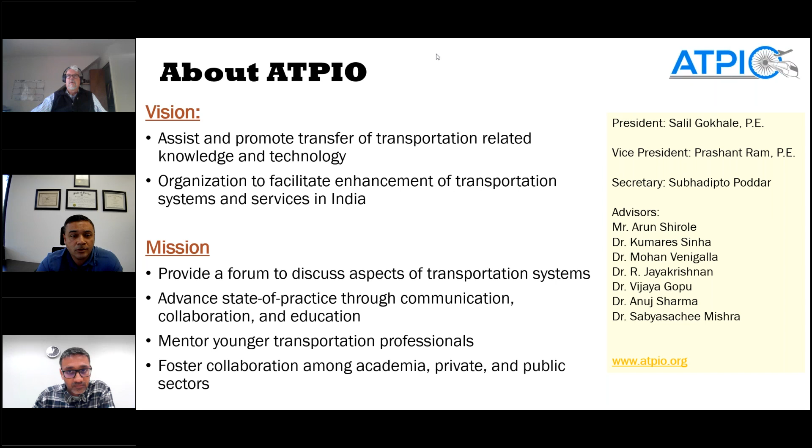All right, thank you, Salil. So today's webinar, Salil mentioned the topic, it's all about reducing the carbon footprint of concrete, and this is a very timely topic today. You might have seen the announcements from the White House. In general today, there's a lot of emphasis on moving towards greener energy sources, greener materials. I won't say anything more, that's what we're here to learn about from Tom. But I'm not going to give you a formal introduction to Tom, as many of you might already know him from other interactions with him. So I'm going to tell you three things about Tom today.

The first time I actually saw Tom Van Dam's face was on Michigan Tech University's webpage about 17 years ago when I was applying for grad school. I was looking for professors to work under, and I saw that photo on the webpage, and I thought, this is a person I never ever want to work with. That photo was really scary. So the lesson learned was, first impressions are strong, but they are not always right. I've had the opportunity to work with Tom a lot over the last 15 years, pretty much my entire professional career. And then I've gotten to know him a lot more closely through projects I've worked with him on, and he was the one who introduced me to the topics of environmental sustainability and climate change.

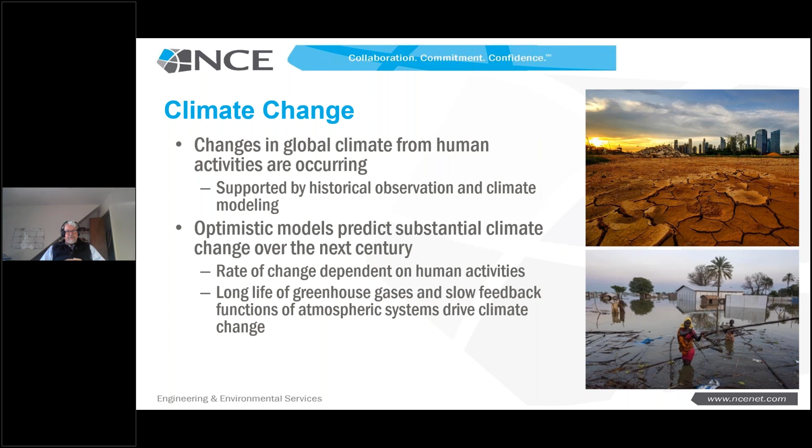Optimistic models looking forward predict substantial climate change over the next century. And the rate of change is going to be dependent on what we do as a species worldwide, and these greenhouse gases that we are emitting today have a very slow feedback function in the atmosphere, and they are driving climate change. And even if we change our ways today, we're going to see these effects at least till 2050.

The certainty is spelled out in the IPCC 2021 document, summary for policymakers. It's unequivocal that human influences have warmed the atmosphere, the ocean, land. Widespread and rapid change in the atmosphere, ocean, cryosphere, and biosphere have occurred. This is without question. The uncertainty really lies in how the future will change, depending on uncertainty within the models and in the uncertainty of what we do.

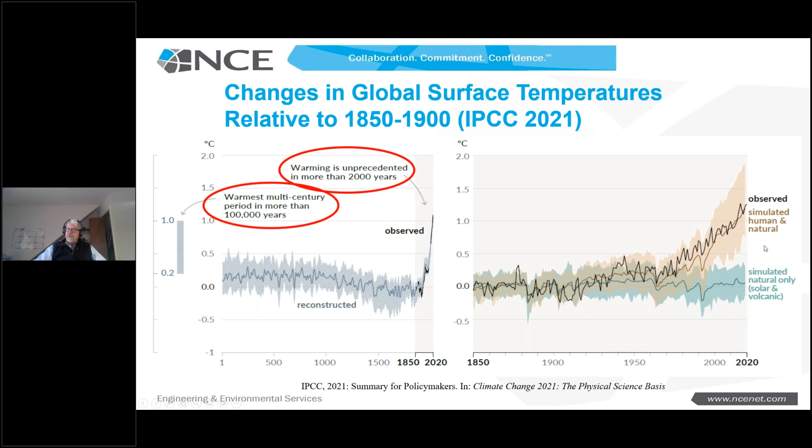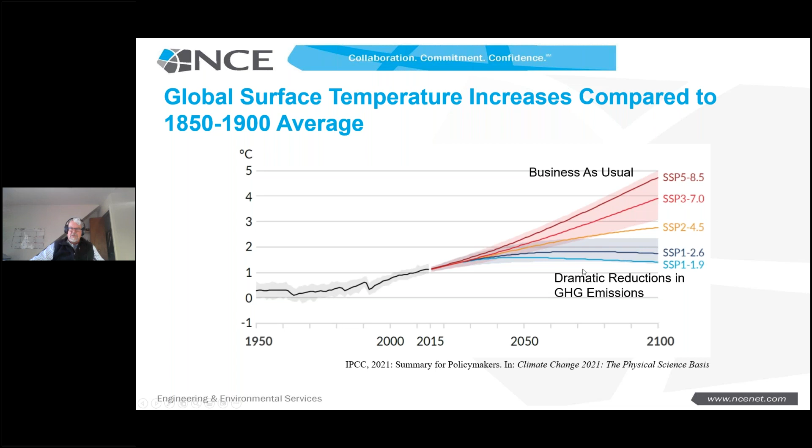If we look at those averages, they take us to about this point right here. And depending on what we do going forward, if we keep business as usual, we are going to see dramatic, almost 5-degree average change in centigrade into the future by 2100, which would be absolutely devastating to the world's ecosystems and to humanity. If we even do modest or fairly aggressive changes to try to reverse things, we'll get here to just under a 3-degree centigrade increase. And what we're really trying to focus on is about a 2-degree change, and that's going to require some really, really significant efforts.

If we look at that 2-degree increase in global average temperature, models would predict basically the entire globe is warming. Certain areas are going to be very dramatically affected, and that's the North Pole in particular, the northern part of the globe. The Arctic is definitely suffering right now. Permafrost is melting and there are a lot of negative impacts.

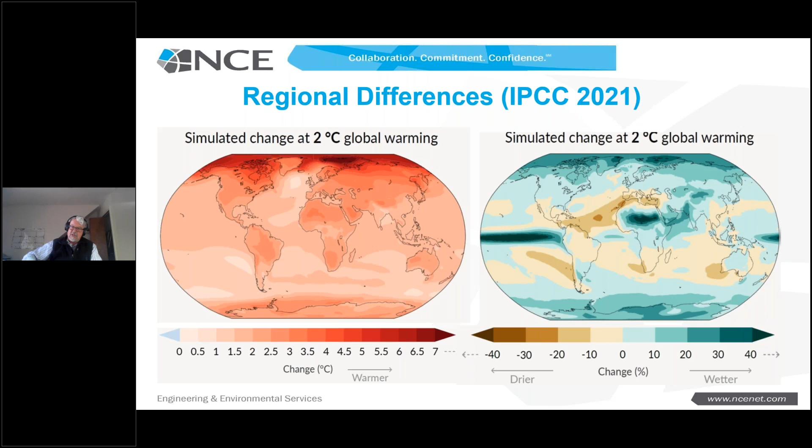Moisture-wise, it's a hit or miss. A lot of areas are going to get drier, some significantly so, such as in southern Africa, the southwest of the U.S., with predicted droughts. India, parts of it are going to get wetter, so India will be getting warmer and wetter, and with that higher humidity and higher temperatures, it's going to be very stressful on the population. Also, some of this water comes in other forms, as we'll talk about momentarily.

The likelihood of sea level rise, it's already rising. Most estimates are placing it under a meter, which will still be a very traumatic effect on a lot of the world, a lot of the coastal areas. But in the low likelihood, high impact storyline, if we get ice sheet instability, we could see 1.5 or more meters of sea level rise, which again would be devastating to coastal areas in which most of the world's population resides.

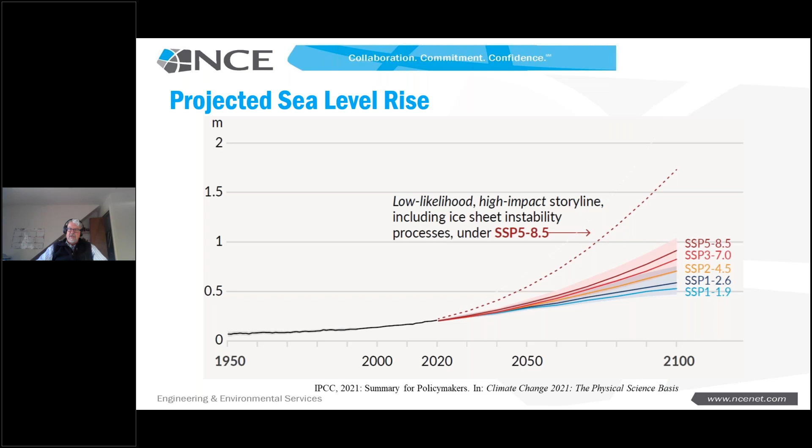It all depends on regional differences, temperature, salinity. I think the key element of what's happened recently is we're seeing much more flooding in coastal areas, even sunny day flooding, where there's no storm, nothing at all. Miami is starting to see flooding, and so are other coastal areas in the US and elsewhere in the world. But then also what we just saw recently with Hurricane Ian in Florida, storm surges can be really the most devastating effect on people and property.

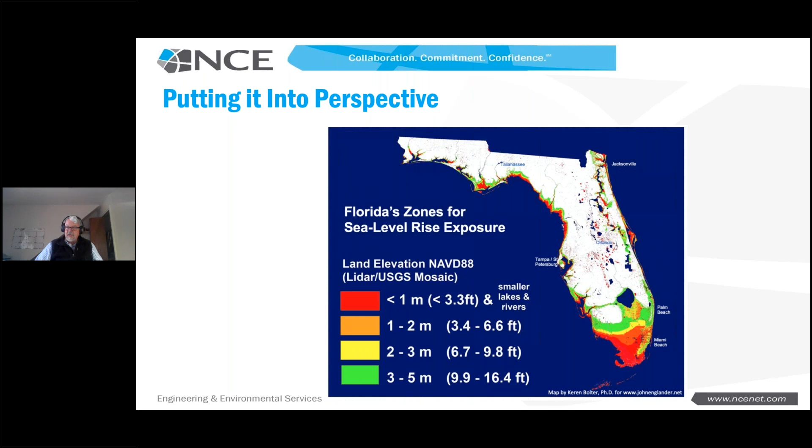And then the final big impact is droughts, wildfires, extreme storms. I lived for years in the Southwest, Reno Nevada, Las Vegas Nevada. The wildfire situation in California and the West in general is extreme. And then these extreme storms, where the extra energy that's been put into the ocean and atmosphere from the heat, it's not that we're going to have more hurricanes or typhoons, but the ones we have are going to be larger, with higher wind velocities and much more damaging.

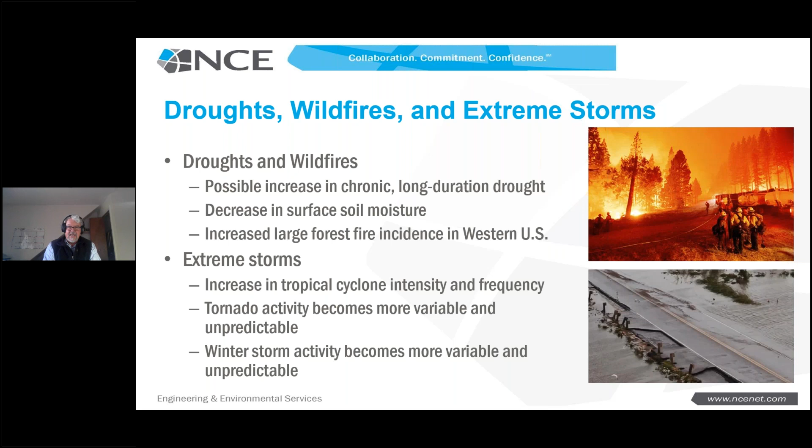All of these combined factors present a challenge. Really the challenge in front of us is that change is difficult. We all know this. It's very difficult to make people do something different than what they've done before.

Focusing on cement and concrete, these are traditionally carbon intensive industries, and we'll talk about that. The way we design, the way we specify materials, are dictated by the past, by what we know and what others have done before us, and it leads to a conservatism in our codes and specs. We have life safety issues we must adhere to, and it just makes it much easier not to change our behavior.

But I feel this is an opportunity, and it's exciting, we're allowed to get out of our rut, to embrace some of these new technologies, a new way of thinking about things, and really change our behavior, the behavior of our industry, and therefore the impact on the world, which is a nice place to be, to actually have an opportunity to make a difference.

The hope is we have a lot of new policies and initiatives focused on sustainability, and in particular carbon reduction. A lot of these fall under a broad umbrella of the Buy Clean initiatives. The cement and concrete industry is focused on change, true of the North American Cement and Concrete Institute, the European cement and concrete industries, and throughout India and Asia.

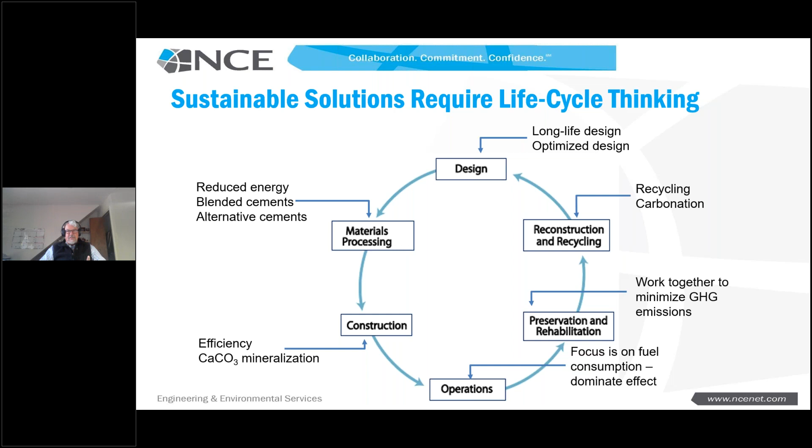Now, circling back to really the topic for today, which is hydraulic cement and concrete mixtures—I call it hydraulic cement, which primarily we're thinking Portland cement. This is the most common building material on the planet. Humankind uses about a cubic meter of concrete per person per year. It's an immense amount of material used, and it is not an exaggeration in the least to say civilization is built with concrete. Foundations for houses, water treatment plants are made with it, port facilities, pavements. You can hardly think of a civil engineering structure that does not contain concrete as an essential element.

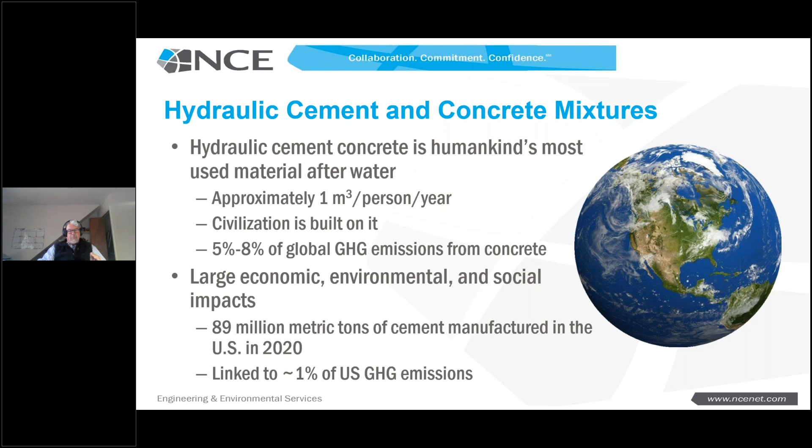But as a result of this massive use of this material, 5 to 8% of the global greenhouse gases produced every year are from the manufacture of Portland cement and concrete. The large economic, environmental, and social impacts of this material—in the US, we make about 89 million metric tons of cement annually. We're almost now at our steady state maximum, where we're now importing about another 10% into the US economy. It's linked to approximately 1% of the greenhouse gas emissions in the US.

If we look worldwide, what you'll see is the big user of concrete is China. Roughly 57% of global cement production occurs in China. The second largest is India at 7% of global production of cement, whereas the US is down around 2%.

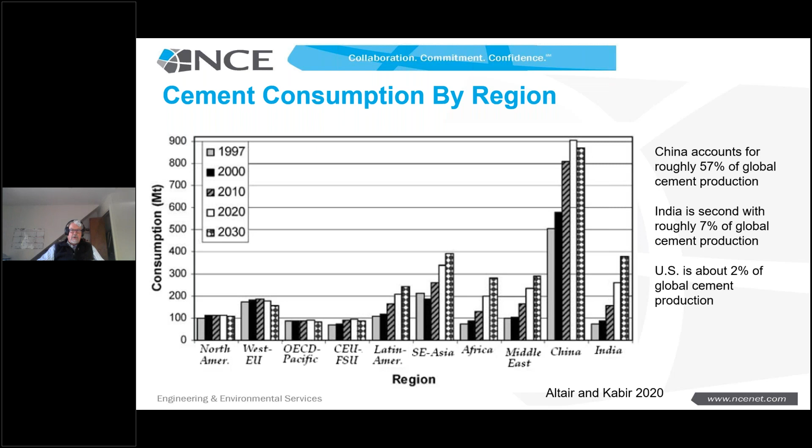The big fear here, and this has been written up in a number of papers, is as India continues economic development and growth, that they will follow the Chinese model. All of a sudden the Indian production of Portland cement will balloon, and it'll become a much bigger contributor to global greenhouse gases. We'll get to some things going on in India momentarily that are actually a bright spot to avoid this problem. Why is cement such a big deal?

We can go out, we can dig a hole, we can mine limestone, we can mine clay, shale, process it, get it ready to feed it into a kiln, and that's only about 1.5% of the total greenhouse gases associated with the production of that cement or concrete. 89%, almost 90%, is from actually burning those raw materials in a cement kiln. 37% of that is from the fuel being used, but 46% of all of the CO2 associated with a cubic yard of concrete at the gate of a concrete plant is from taking that limestone, converting it from calcium carbonate to calcium oxide and CO2.

A tremendous amount of CO2 is being liberated from burning limestone. Once we make the cement, that's over 90% just in the Portland cement. Only 9.5% of all of the rest of the CO2 associated with that cubic yard of concrete is from making this concrete itself at the gate. Net result is for about every pound, kilogram of cement made in the US, about 0.94 pounds of greenhouse gases are liberated, almost all CO2.

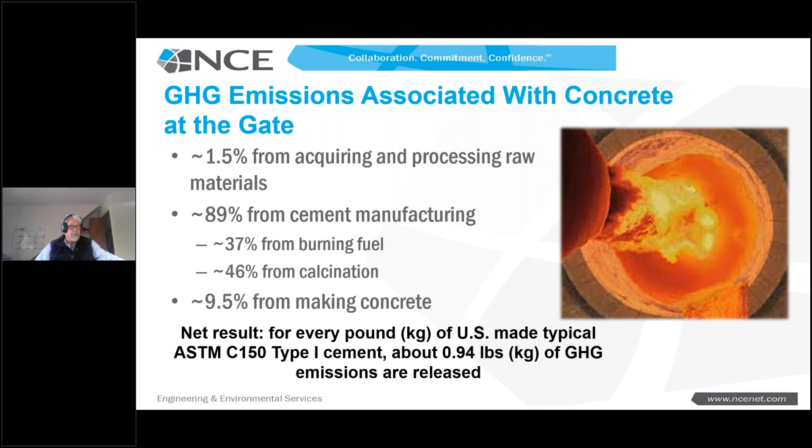So we take that cement, we mix it with gravel, sand, water, and some admixtures, and at a typical concrete gate in the US, we have about 310 kilograms of CO2 per cubic meter. 275 of that is from Portland cement production. So when you look at those numbers, you know where the focus needs to be, and that focus needs to be on Portland cement and what we can do.

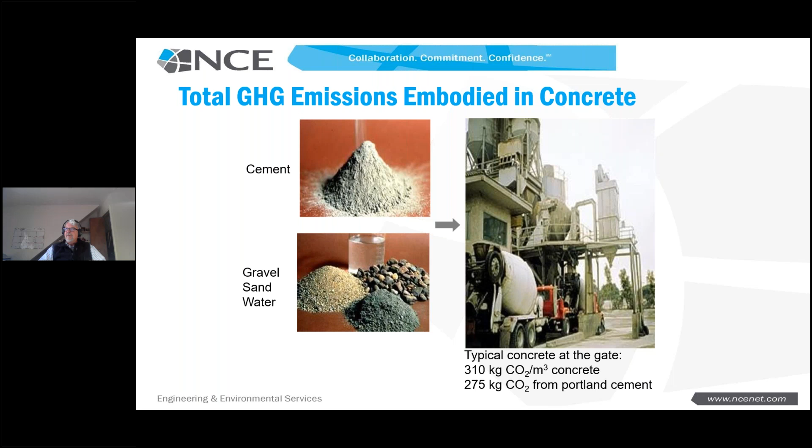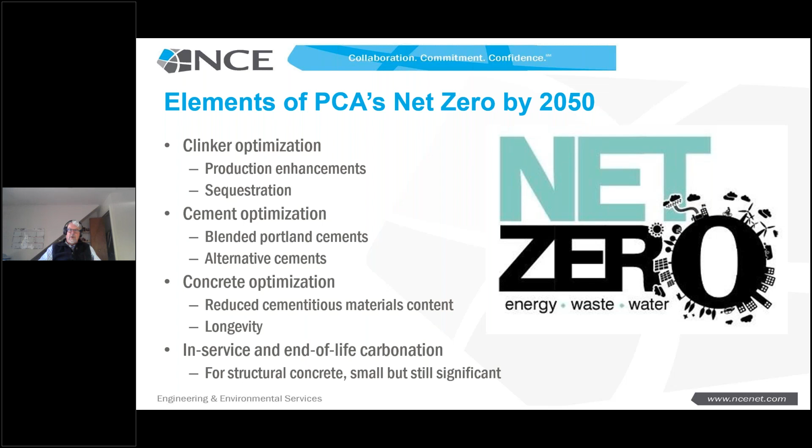So the Portland Cement Association, being very bright people, understands that this is something they have to grapple with. They have come out with their net zero by 2050 initiative. There's many parts to it. I'm going to quickly talk about a few, but they fall into clinker optimization, cement optimization, concrete optimization, and in-service and end-of-life carbonation. Those are four of the big pillars of what they're doing, and I'll talk about each individually a little bit. But the plan is definitely something worth looking at, and it's something mirrored in Europe and elsewhere.

So how can we reduce greenhouse gases during production? Obviously, we can go into super efficient kilns. We can look at high efficiency grinding mills for grinding clinker, gypsum, and SCMs and other blended materials, limestone.

We can look at waste fuels, and ultimately maybe plasma, if we can get lightning in a bottle and have something like fusion or an abundant source of clean, free electrical energy. But remember, this is only

35, 36% of the total greenhouse gases associated with making concrete. The other thing to recognize is because we're basically calcining that limestone and driving that CO2 out of the flue, you have about 25% mole volume of CO2 in the exhaust gas of a cement kiln. That is a great place to grab CO2. It's a great place to sequester CO2.

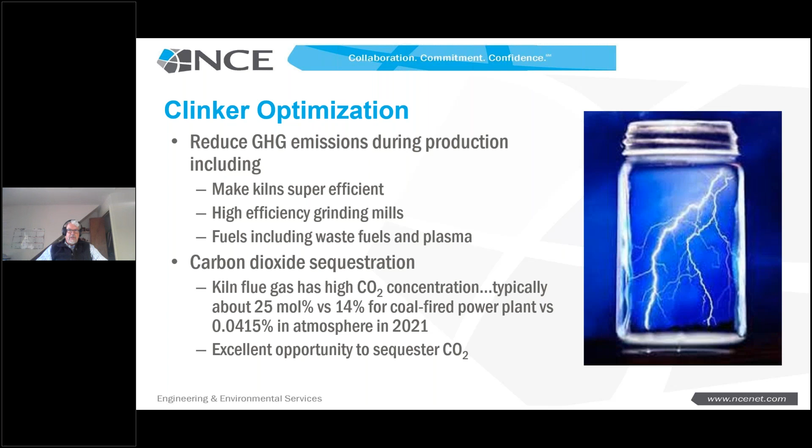The plan in California right now, I can tell you, is by 2035 they're expecting to have operational sequestration going on 1 to 2 of their 7 operational cement plants. Worldwide, this is already being done on an experimental basis and will largely be brought about throughout the world. Again, understanding where we're getting the electricity to do the sequestration, and what we're doing with the sequestered CO2, are issues we still need to solve.

When we move to cement optimization, this is about replacing that Portland cement clinker that we got out of the kiln with other things. The most common other thing is a supplementary cementitious material. In the US, that's most commonly fly ash, but it could be fly ash and other things. This can happen at the concrete plant, or it can happen at the cement supplier who does the blending.

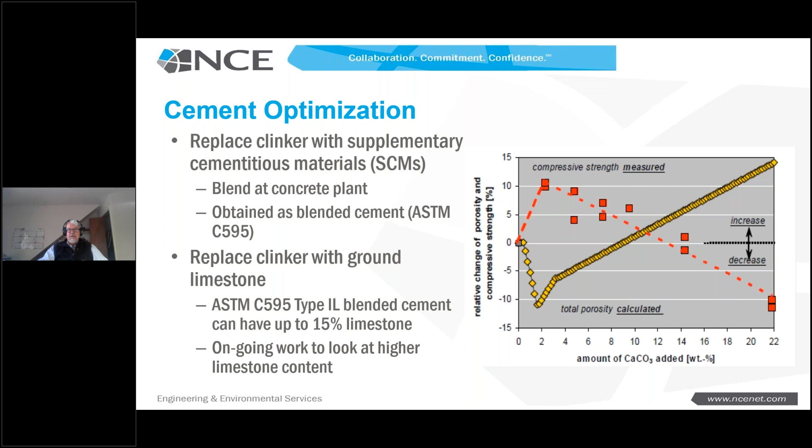A second thing that we can replace with is limestone. In the US now, with ASTM C595 type IL cement, which many of you are probably seeing in your markets if you're in the US, basically you can intergrind realistically 12%, some are pushing it up to now 13, 13.5% interground limestone. It works very well together with an SCM, and we'll talk about that. So we can start to reduce the clinker content of that cement, and that's the way to really drop that clinker factor, or the kilograms of CO2 per kilogram of cement.

Supplementary cementitious materials include fly ash collected from the flue gases of coal burning power plants. Less and less of these plants are available in the US and elsewhere, obviously because of the switch away from burning coal. We have slag cement as another source, where we can take ground granulated blast furnace slag and grind it up, and it creates an excellent cementitious material. And then natural pozzolans, calcined clays, volcanic ashes, ground pumice, other sources of natural material that are naturally pozzolanic that with some processing can be used.

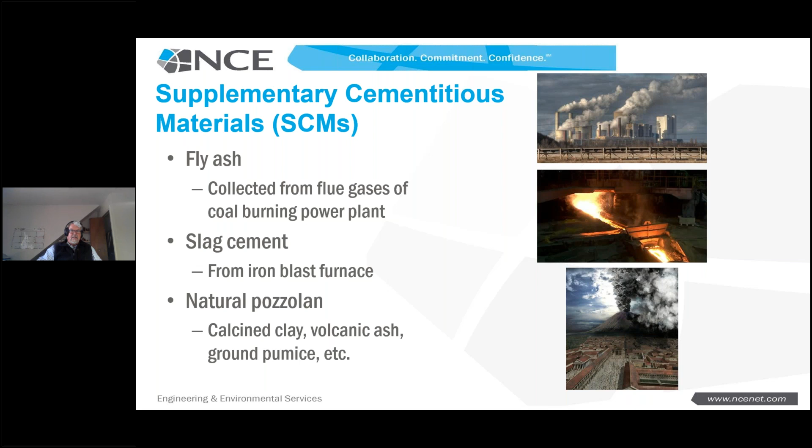So these are the common ones that have been used. These days, there's a lot of interest in alternative SCMs. ASTM C618 is starting to expand its definition of what is going to be an acceptable pozzolan for use in concrete. Reclaimed ash that's mined from landfills or ponds is one really major source of potential pozzolan, and this is

already being done. We often have to process this. We have to dry it. We have to burn out some carbon on occasion. We have to do some grinding to make it work, but it seems to work well. More uses are being considered for ground bottom ash, ground glass, and then there are some specially prepared pozzolans being looked at that are even sequestering CO2 in the process. So all of these are being investigated and more are being sought.

The blended cements that I referred to have been around for a very long time. The type IL was added, I believe, in 2008. This is very common in a lot of the world, very common in Europe to buy a blended cement. I've spent quite a bit of time in Africa, Central America, South America, where it was very common to buy your cement already pre-blended. But it's in general not a very common thing to do in the US, though I think we're going to see more and more of it.

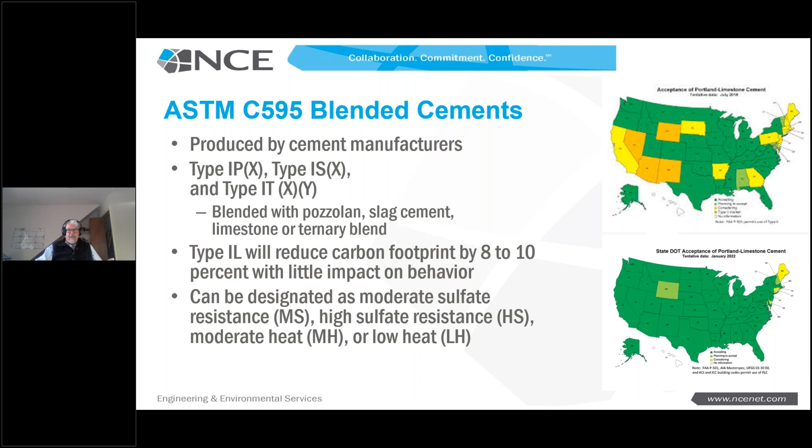And so if you can work with a ternary blend of a limestone with a pozzolan or a slag, these can be very effective because the sulfate balance can be handled by the cement supplier, and we can have a very workable product. There's also a lot of interest, because clinker is so energy intensive and so carbon intensive, to look at alternative cementitious materials.

These can include some that we already commonly use: calcium sulfoaluminates, calcium aluminates, magnesium phosphates are all cements that have been on the market throughout the world for a long time. Many of them are very fast setting, but they are often very costly. So from a price point, I know these are not something that can easily enter widespread use.

Non-traditional blended hydraulic cements - one that the world is very excited by is LC3. If you want to see a really interesting video on this, just Google Wisconsin Girl Scouts LC3. These Girl Scouts, led by a woman named Julia Porter, did a fantastic job explaining LC3. This is a blend of Portland cement, calcined clay that's of a lower quality than pure kaolinite, and limestone. On the right are some figures representing the LC3 type formulations that can occur.

This is something I was talking to Prashant about. He said there's already a couple of cement plants in India in full production with LC3. It's a possibility of using common, abundant materials to reduce clinker content by 50% or more of our cement, which is a significant step in the right direction.

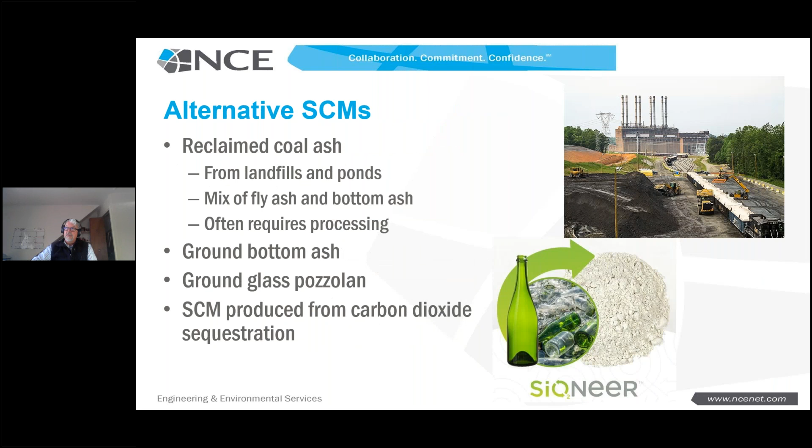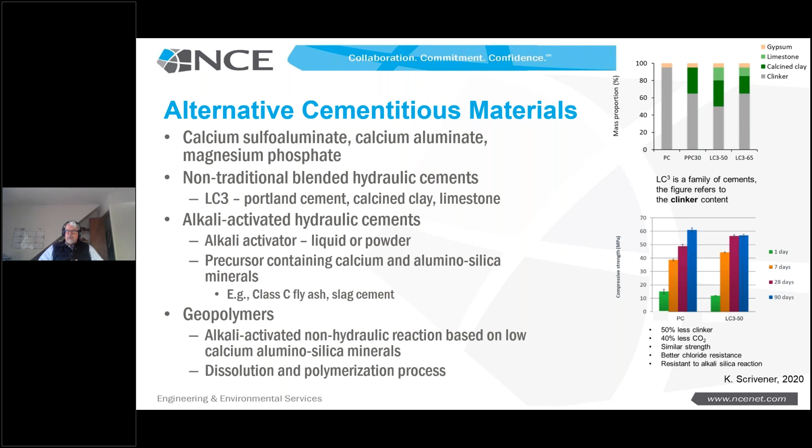Another alternative is geopolymer, which is a completely different reaction where again we hit it with a highly alkali environment, some kind of activator that raises the pH of the solution. That leads to dissociation of the alumina and silica chains in some glasses, and these then start to polymerize. This is not a hydration reaction at all, but a polymerization reaction that creates a very durable cement and concrete.

These are available - runways have been built with geopolymers. Alkali activated hydraulic cements are on the market as some high-end specialty materials. Calcium sulfoaluminate cements are commonly used as a very good rapid set repair material. But there is no scenario in which a sufficient amount of alternative cementitious materials exist to replace the versatility and availability of Portland cement. So we can nibble around the edges and make some inroads, but we're not going to solve our problem likely this way.

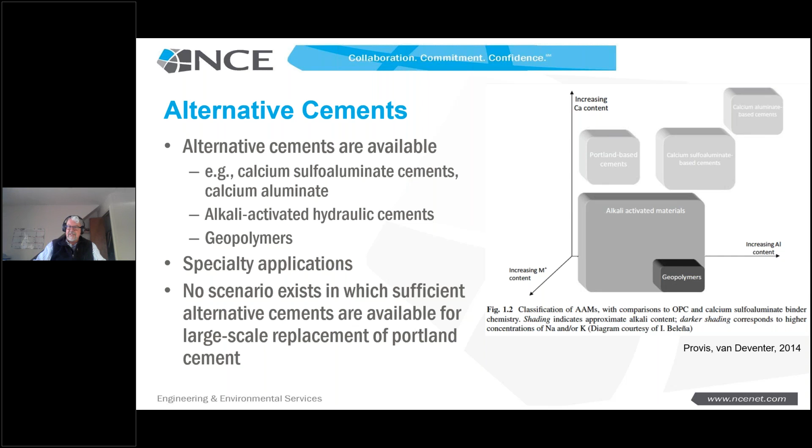So what can we do today in a practical sense? One thing is use a low clinker cement. The second part is to use less cement. And the best way to use less cement is put more aggregates in our concrete.

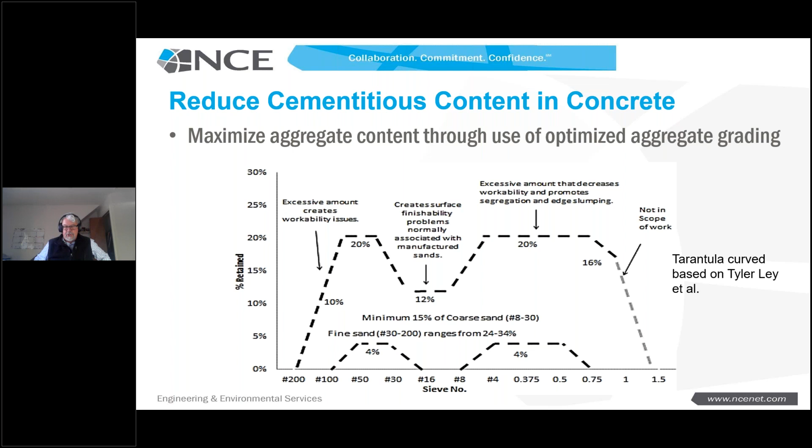There's been some excellent work done by a number of researchers. This shows something called the tarantula curve by Tyler Ley and his group at Oklahoma State University - one way to proportion aggregates. This is for a paving mixture, but he also has another curve for pumpable mixes. With this, you can take mixes that might have 564 pounds, 611 pounds per cubic yard of cementitious materials, and pull out 50, 60, 70, 100 pounds of cement out of your mix.

There's a common fallacy, and I see it time and time again, that more cement in a concrete means more strength. It's simply not true if a mix is properly proportioned. I'll put a caveat on that: if you need higher strength and you're in an uninsulated type of environment, additional cement will help your early strength because the extra heat of hydration will speed things up. But there are other ways to address that.

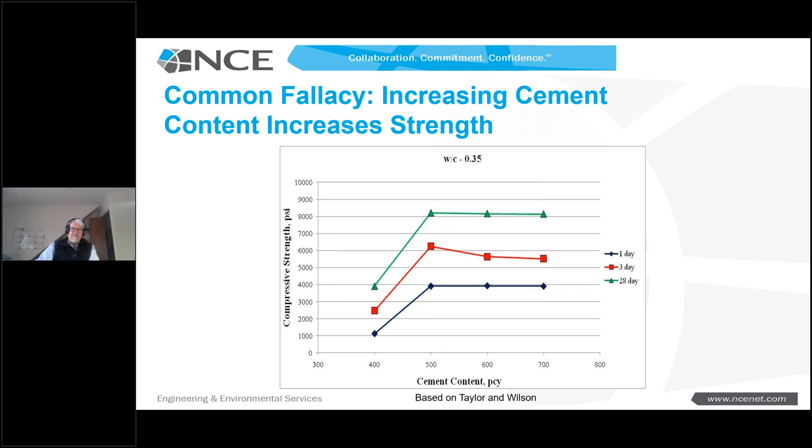This shows some work done by Peter Taylor and Wilson at Iowa State University for a given water cement ratio, fairly low at 0.35, with different cementitious contents. You can see almost no difference in strength at different times once you get past about 500 pounds per cubic yard, once we have enough cementitious material to fill the gaps between the aggregates.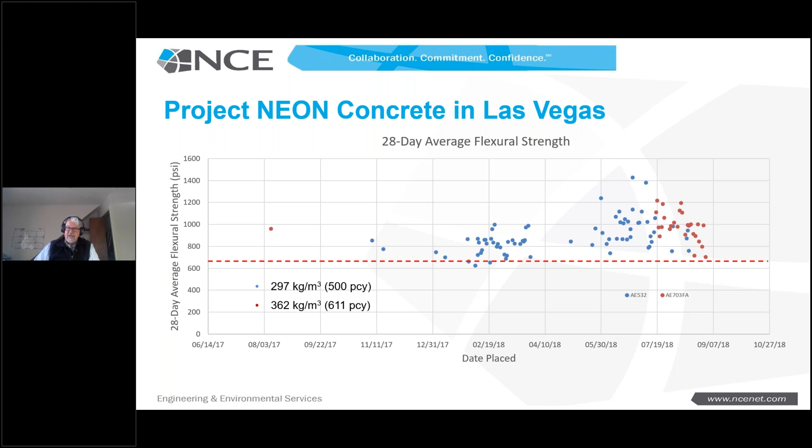As a matter of fact, statistically no difference in strength between 500 pounds total cementitious and 611. These both have 20% Class F ash, same water cement ratio. This is a clear indication that real concrete being placed on grade in multiple places around the country is being placed with very low cementitious content.

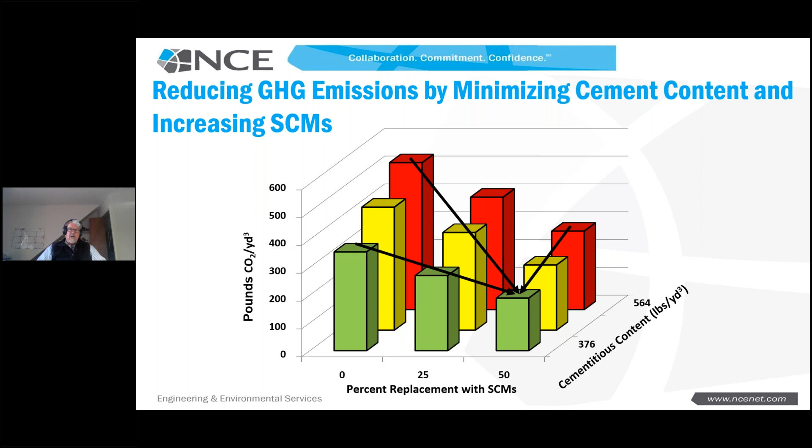So the takeaway is, if we increase the amount of SCM or other additives to replace clinker, like an LC3 system or a blended cement system or blending at the concrete plant, and we use optimized aggregate grading to reduce our cementitious content, we can dramatically impact and reduce the amount of greenhouse gases associated with our concrete. This is a very important point.

So if we get into something like in-service performance, one other part of the PCA plan that's very important is carbonation. I think what we have to realize about carbonation is, we talked about the fact we took limestone, put it in a kiln, burned it, created calcium oxide, and released CO2. Well, that CO2 is out there, and it wants to get back together with that calcium oxide, and it will over time in a concrete structure.

So the concrete structure begins to carbonate. The picture on the right shows basically a concrete specimen that's been slabbed and stained with phenolphthalein, and you can see the carbonation front in this specimen. This is a pavement, that's a joint, and you can see how we got some carbonation. Everything that's not pink has carbonated. This is kind of typical for a pavement, what we're seeing here on the right.

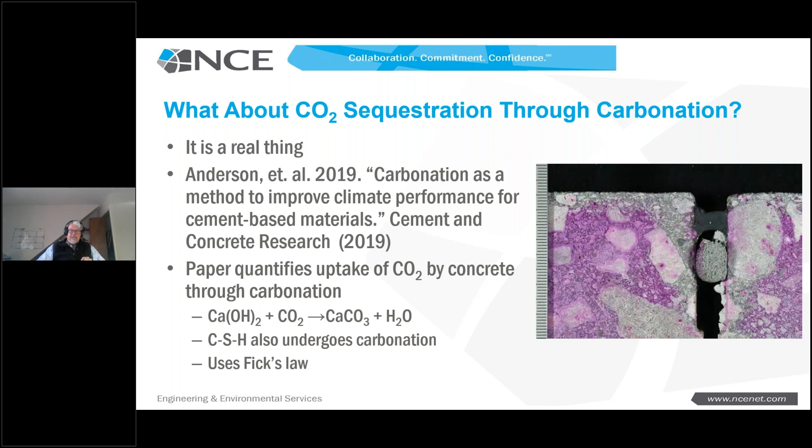This paper by Anderson et al. is a great paper. It talks about how CO2 uptake occurs, how we're converting the calcium hydroxide and CO2 to calcium carbonate, and it uses Fick's law as the assumption in the paper, depending on the exposure and quality of concrete.

If you are in a dry environment or an area that has periods of a lot of dryness, so maybe between monsoons for example, and you have concrete that's fairly porous, you will see a very high degree of carbonation. So a roof tile in a place like Africa, or possibly through other places in the world, is going to really go through a high level of carbonation.

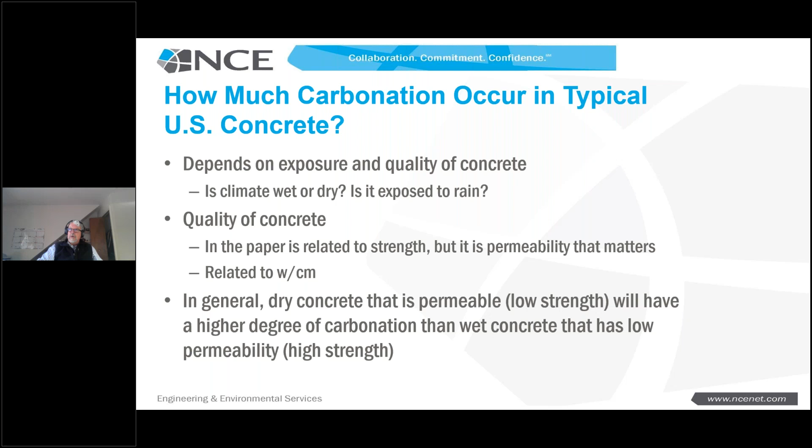If, on the other hand, we have very high quality concrete that's underground, concrete that's kept wet, you're going to see relatively low carbonation. I'm going to do a little illustration here on a typical US pavement to demonstrate maybe how this could work in a model when we think about the life cycle. So basically a standard 4,000 PSI concrete pavement, a 6-sack mix, 564 pounds per cubic yard.

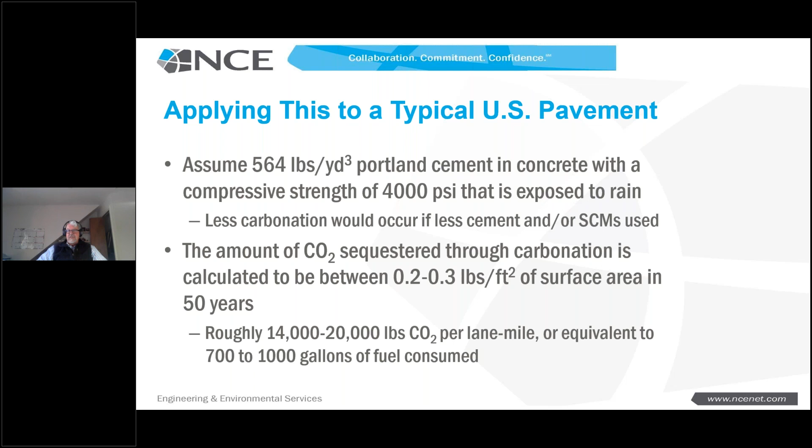If we do the calcs, we're going to find out over something like 50 years, we may see roughly 14,000 to 20,000 pounds of CO2 carbonated per lane mile of that pavement. That's about 700 to 1,000 gallons of fuel consumed, which is not a heck of a lot, but it's not nothing. It would look something like this, with the higher quality concrete carbonating less than a lower quality concrete.

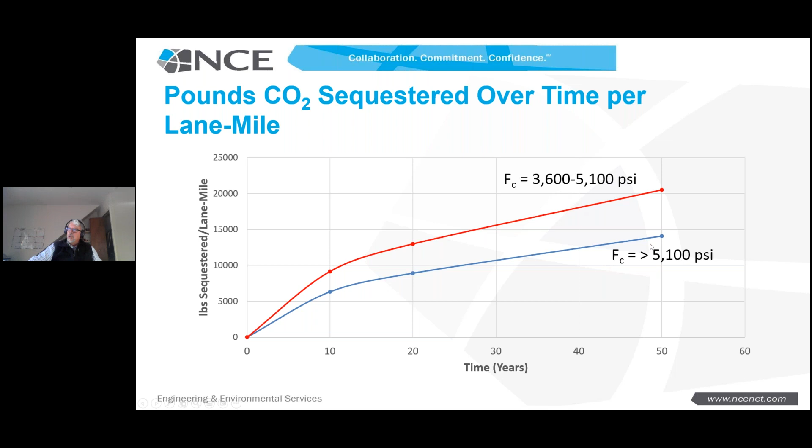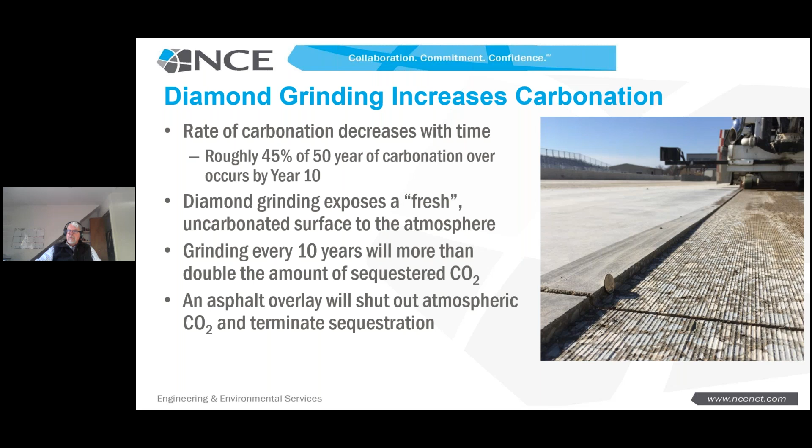One thing I wanted you to think about, though, is in this case, if we diamond ground that surface. Let's say after 10 years we diamond ground it, ground off the carbonated part, exposing fresh paste. What you will see is the carbonation reaction will resume. And what that might look like is, with grinding every 10 years, we're going to end up sequestering a heck of a lot more, more than double the amount of CO2 that gets sequestered in that concrete.

On the other hand, if our choice of a fix in this case was to seal the concrete up with an asphalt overlay, we basically ceased carbonation. This actually talks a lot about concrete block, right? If you're looking to sequester CO2 and you paint your block, you're not really going to get much carbon sequestration there.

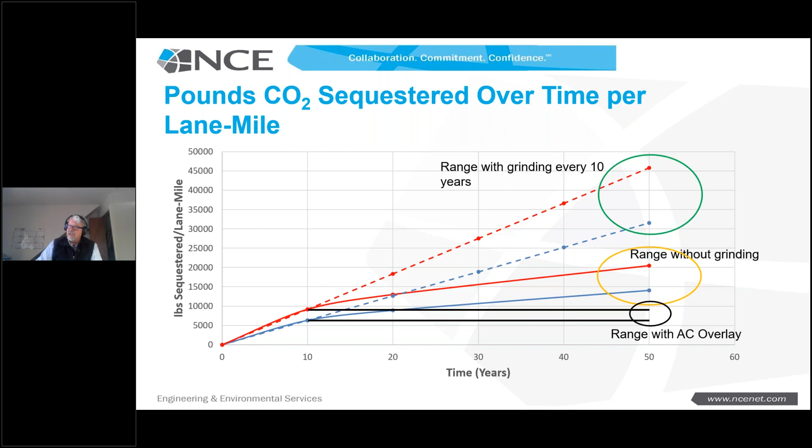Why I think this is interesting is if we looked at the amount of CO2 that it would take to grind, and we look at what diamond grinders consume over a lane mile of pavement, we almost end up being carbon neutral with that diamond grinding.

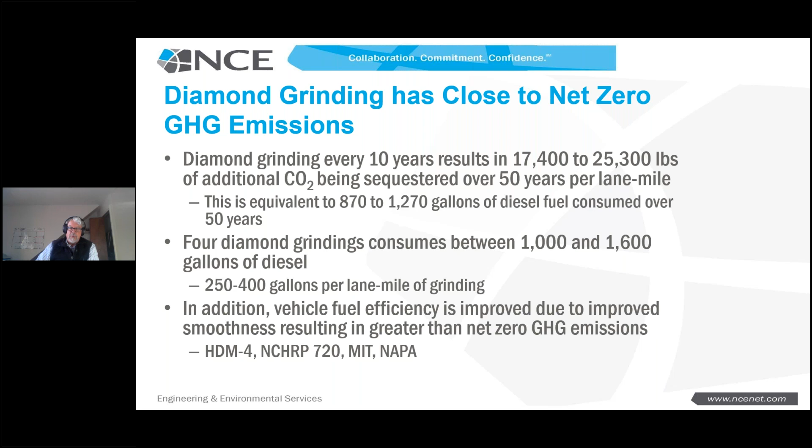Even though we're expending fuel to grind that surface, it's basically coming out flatlining at a net zero with the amount of extra carbonation that would occur. And the thing we're not talking about is the added benefit of smoothness. If you look at the HDM4 pavement models by the World Bank, the National Cooperative Highway Research Program 720 study, or work at MIT or by NAPA, you'll see a direct linkage between fuel consumed by vehicles operating on a roadway and how smooth they are. If we can smooth out roadways and keep them really smooth, we're going to have a tremendous amount of savings.

Now, coming up on the last topic here, which is assessment. This, in my opinion, after education, is maybe the most important thing. There is a lot of greenwashing going on throughout the industry, throughout a number of products. Everybody's got green products, and this emphasis is going to become more and more so as more money and initiatives are brought about to reduce our carbon footprint. We must adopt the use of standardized assessment to know that we are doing the right thing. We have to be able to look at an LCA, a life cycle assessment model based on ISO standards, to assess what changes we have made and what they really mattered.

So on concrete, what's going to be happening more and more is you can request an EPD. You can have your baseline mix, and some producers in the US are already doing this. You can request an environmental product declaration that was developed using rules established by a very rigorous process, and that was used to execute a life cycle assessment. They can tell you, basically with those rules, how many kilograms of carbon dioxide are in that cubic yard of concrete.

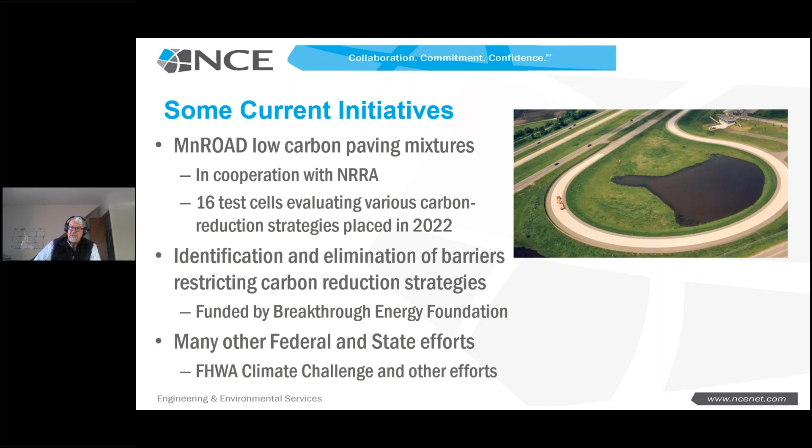So in summary, sustainable concrete practices are available for all concrete structures for all phases of life. My bias in the slides probably came through a little bit on the highway side, because that's the pool I swim in, but I do a little bit of commercial work as well, and it's completely applicable to buildings, warehouses, public workspace for sure.

Sustainability requires a life cycle perspective. So every time you're making a decision, make sure you keep that life cycle in mind. I will tell you the most unsustainable solution is the one that fails right after you do it.

I've been involved now with two interesting paving projects. One of them a plastic pavement that recycled plastic, even though it wasn't really recycled, but a plastic binder replaced the asphalt binder in a pavement. It failed within a week in that particular project. And then recently one with an alkali activated cement that we could never place. Now it doesn't mean those products in and of themselves are bad, but they weren't very robust for that application. So make sure you keep that life cycle perspective as you move forward.

Strive to optimize your cement and concrete. When a spec comes to you, just push back sometimes. I push back on so many specs all the time, and I will tell you most of the time I will get overruled. I feel like that guy pushing that stone up a hill, but don't give up. Keep pushing back, keep trying to do the right thing, and every once in a while, like on Project Neon, you can be successful.

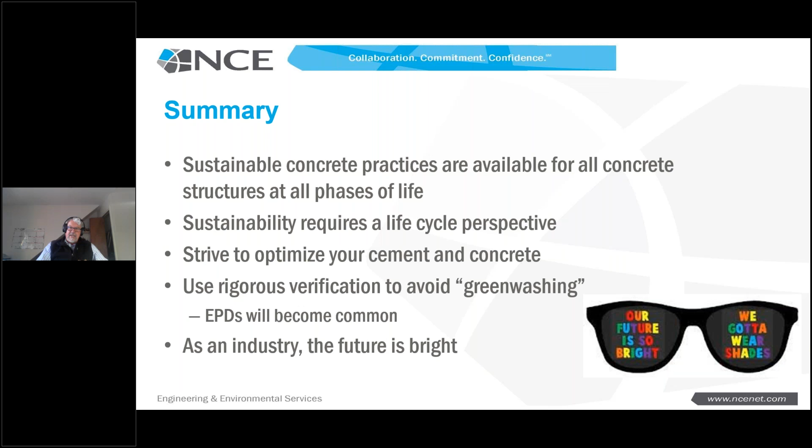All right, thank you, Tom. So we do have a few questions. I think a few of them I'm going to ask you, and then a few from Salil. So maybe I can just get started with one of the questions I have. The first question is really about the diamond grinding study you were referring to, and people were asking if you could share the source for that particular study. If you can put it in the chat box.

The source is me. Basically it's just calculations that I've done using the equations, and people have looked at different elements, and I think it'll be looked at more, and I'll probably be found out to be really wrong, but I don't think so. I will tell you that in my work, I've done a lot of petrography, so we look at a lot of carbonation depths within concrete pavement. We typically just see 4, 5, 6 millimeter depths. And then when we look at a diamond ground pavement that's been out there a while, we again see that 4 or 5 millimeter depth of carbonation. So as long as we can expose the surface of the concrete.